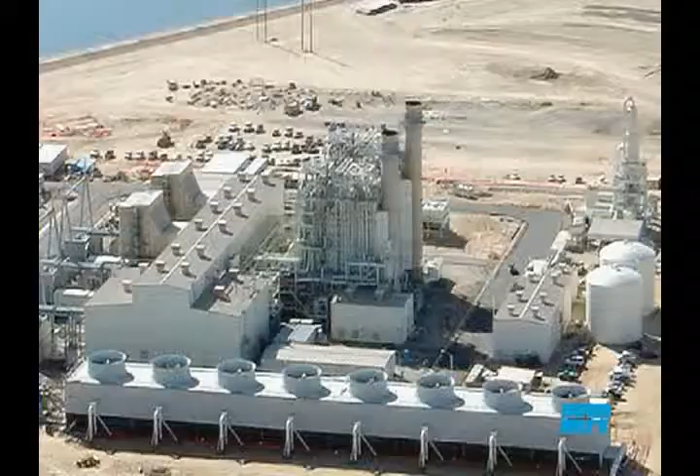Burns & Roe has designed a wide range of fossil fuel plants fueled by everything from oil to gas to coal. In fact, we were there for the first conversion of an oil-fired power plant to coal.

There was a period in the early 80s when the price of oil had skyrocketed. We were still at that time burning oil for a significant amount of the country's power. So people were looking seriously at converting boilers that had been designed to burn oil into burning coal.

One project in Korea actually did go forward. They did what we named a major conversion, which was a real rebuilding of the boiler, basically. And they got to 100% capacity. Took an oil design boiler with a concept that we developed here, converted it to coal.

As the environmental awareness era dawned, power plants increasingly featured new technologies for cleaner and more efficient plants. This removed pollutants and met the most stringent environmental requirements.

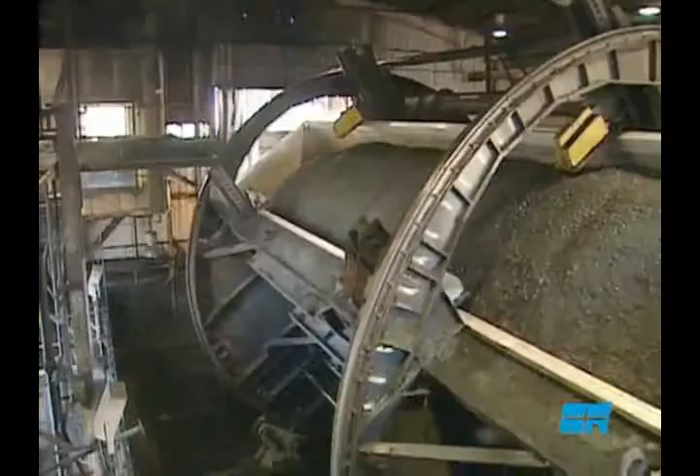The coal plants that we're looking at today are supercritical coal, size-wise about 700 to 800 megawatts, very large. And they are the cleanest plants you can find. We're proud to have just been contracted recently on the cleanest coal project being built in the U.S.

Building upon the new era of rural electric co-ops, Burns & Roe took on public power utilities, aggregating and forming their own generating and transmission co-op. This built Burns & Roe an enviable record as one of the largest power plant designers.

The REA plants tended to be real utility-grade, high-quality plants, and they became sort of our standard. We also assisted in developing the first privately owned, non-recourse financed coal-fired power plant in Southeast Asia.

We have been involved in the overseas markets for a long period of time. We've been involved in Hong Kong. We were one of the first engineers to move into Korea. We did all the early supercritical power plants in Korea.

We have been involved in Thailand from the early birth in the power field. We were the first. We did the first feasibility study for a nuclear power station in Thailand.

We have been involved in Australia for many years as a result of a joint venture established some years ago. We have had offices in Singapore for at least the last 5 years, and we're recently opening an office in Bangkok from which we're going to be addressing the Southeast Asian market.

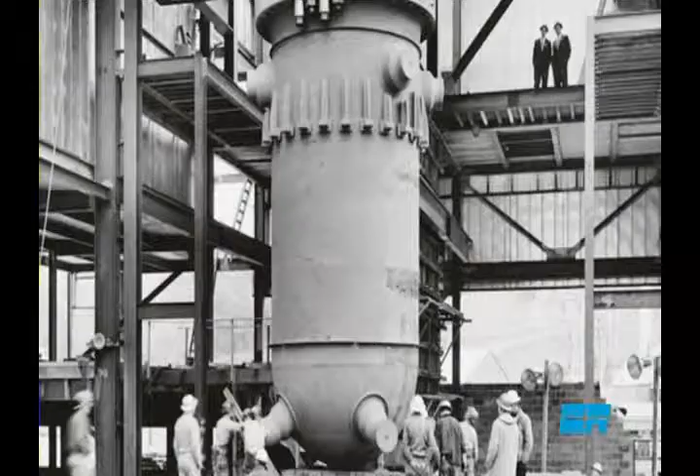Burns & Roe's roots in nuclear power were set down in the 1950s with our involvement in nuclear submarine propulsion. Soon, we were engaged in the work on the first U.S. nuclear plant in Shippingport, Pennsylvania.

As the development of nuclear technology continued, Burns & Roe was selected by the Atomic Energy Commission to build the new production reactor at the Hanford Atomic Energy Reservation, an advanced challenge for the dual purpose reactor.

Burns & Roe was also selected by Jersey Central Power and Light to be the engineer and construction manager for the first privately financed commercial nuclear power plant in the United States, the Oyster Creek Nuclear Power Plant.

So it was really a project that was very cutting edge and also required an awful lot of interaction with an awful lot of people, which is one of the things that Burns & Roe does very well.

When I started with the company in 1974, the company was really bustling with an awful lot of power projects, both for coal-fired plants as well as nuclear. And those projects were really the benefits and fruits of strategies that the company had set forth in the 50s and 60s and even earlier to concentrate on these specific markets.

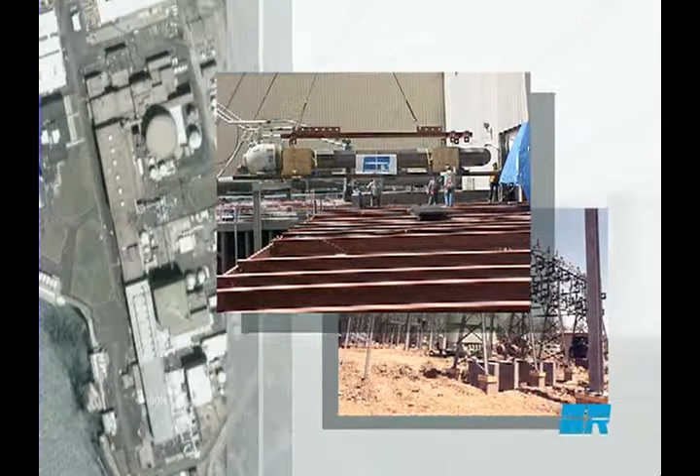As the decade progressed, Burns & Roe moved to the forefront of the nuclear power plant market, designing and/or constructing some 8,000 megawatts of nuclear power plants around the world.

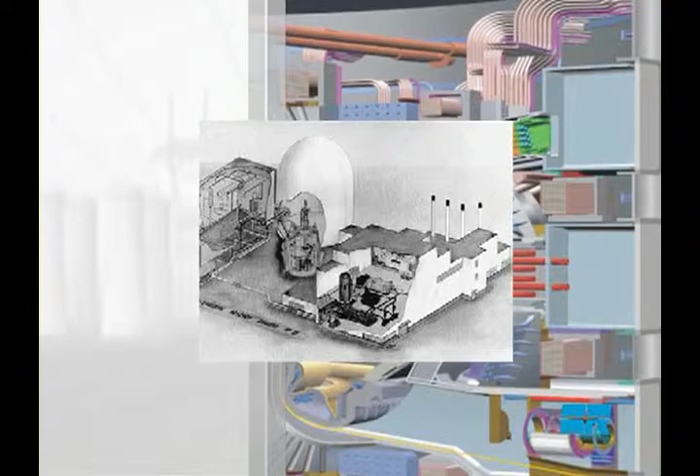We've designed first-of-kind technologies such as a liquid metal-cooled fast breeder reactor at Clinch River. Clinch River was what's called a breeder reactor, which actually allows it to produce more uranium fuel than it consumes.

The project was very important to us because it was another representation of how Burns & Roe had developed this first-of-a-kind capability to really take brand new technologies and apply them to the commercial marketplace.

And now, as the nuclear renaissance unfolds and new plants are being developed, we are again at the forefront of the nuclear power rebirth, a position secured by our legacy.

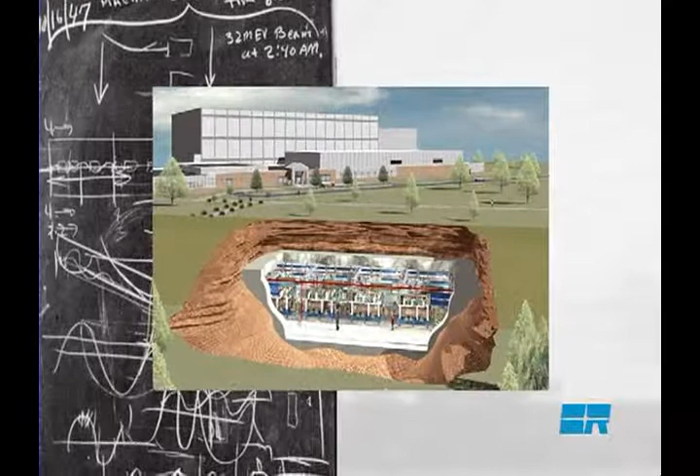In the advanced power sector, Burns & Roe continued to build its legacy of technology and innovation, working with the Department of Energy on programs such as MHTGR, and APT, an advanced linear proton accelerator for the production of tritium. What we did was develop a design for a linear proton accelerator, which was a mile long.

It accelerated protons to 9/10 the speed of light and operated, in the final third of that accelerator's length, at just a couple degrees above absolute zero temperatures. The tradition of advancing technology applications remains a core part of our culture and focus.

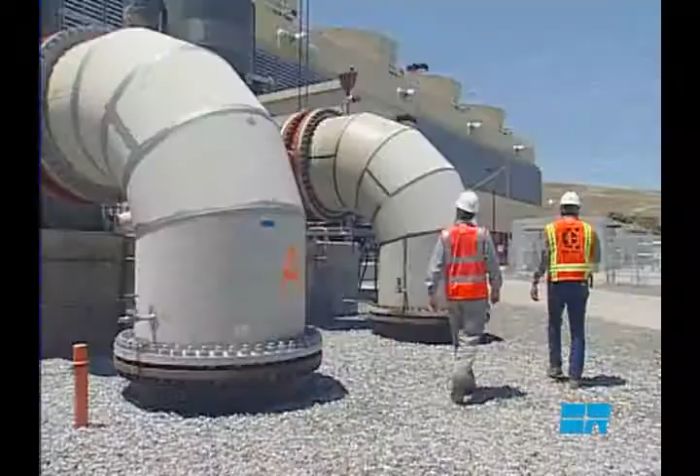Through the 1990s, markets changed with initiatives for deregulation of the power market. Burns & Roe responded and became one of the largest designers of gas-fired combined cycle plants in the United States, the favored technology of the independent power producers.

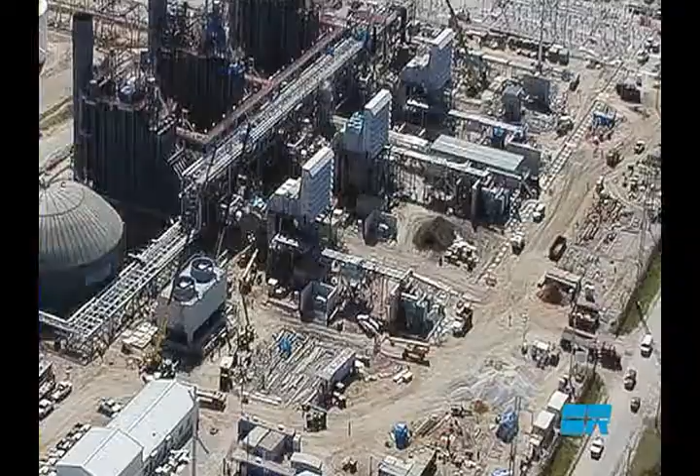With the early legislative moves of the mid-1980s to bring competition to power markets, small cogeneration and other qualifying facilities launched the independent power movement. Burns & Roe used its power design skills, contracting responsiveness, and flexibility to establish a strong base in this new age of engineering, procurement, and construction management projects.

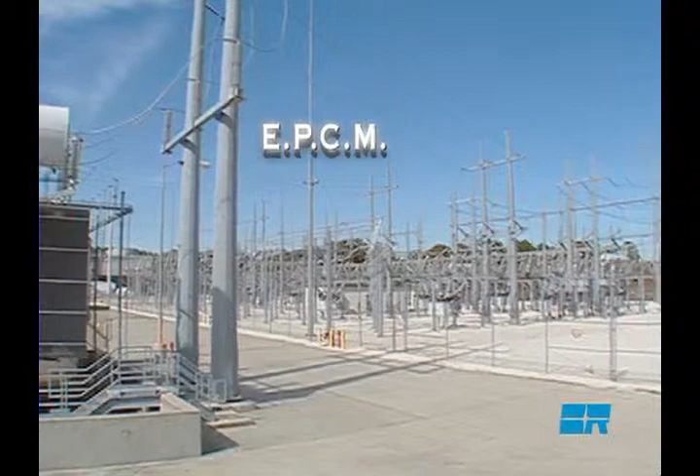Another example of a set of projects that really shows how we work closely with our clients and our ability to bring technology and innovation to them is represented by the Calpine and Siemens projects we've done over the years, particularly the cogeneration project. This project was owned and is owned by a combination of an independent power producer, Calpine, and a large international trading company from Japan, Mitsui.

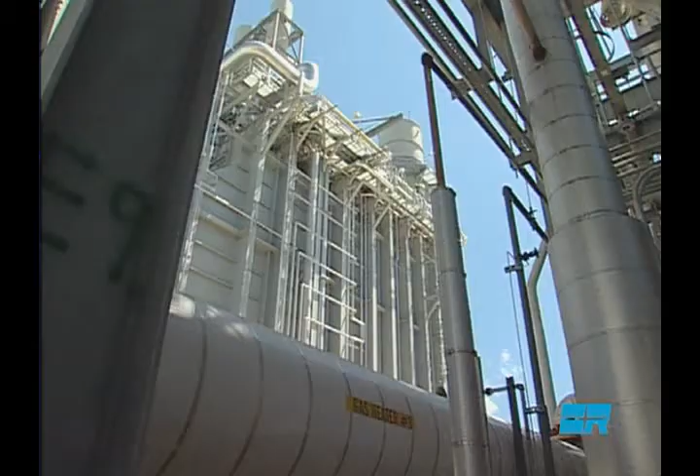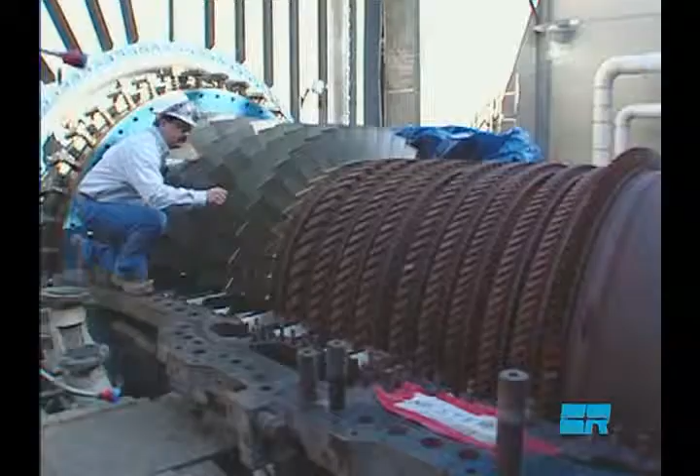We had been doing the engineering on the project, and they asked us if we could expand our scope into doing procurement, services, construction management, and startup. What was different about it was that this project is being independently financed. This was a more economic way of doing it, cheaper. We're using local contractors and using our expertise.

Calpine said along the way that for their most complex plants, the ones that were most technically challenging, they would come to Burns & Roe because of the confidence they had and the excellent working relationship in our ability to design these plants under difficult technical requirements. It's a real mark of the technical innovation and capability, as well as the responsiveness, that we bring when working closely with the customer.

Waste-to-energy and biomass plants also took advantage of the open access provided by this new competitive power legislation, attempting to deal with another serious environmental issue: what to do with the world's growing waste. Burns & Roe again applied its technical know-how and designed a major share of the mass burn facilities built on the east coast of the United States.

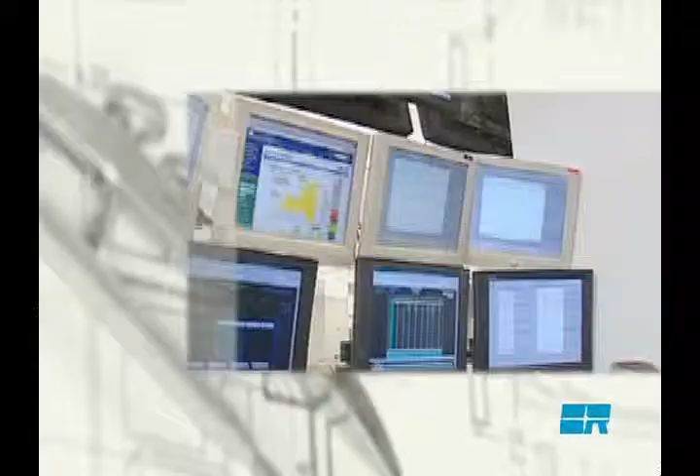The continuing expansion of deregulation led to the dominance of independent power and gas-fired combined cycle plants, while Burns & Roe's excellence in design and innovation led it to be the leader in cogeneration, as ranked by Engineering News-Record.

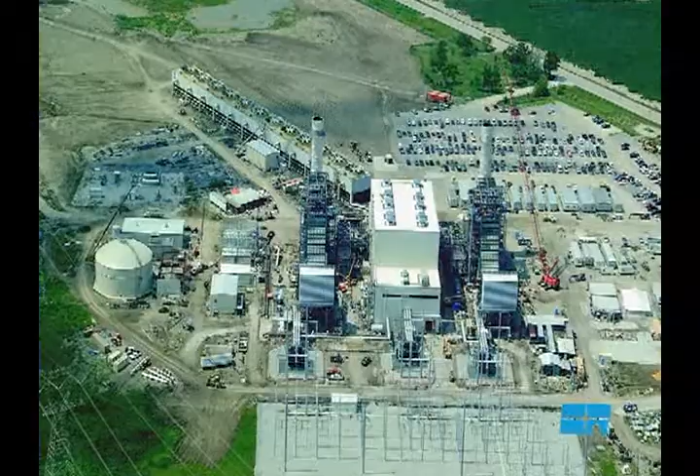Turning its outstanding ability to apply technology, the company undertook a reinvention of how work was performed and how projects were executed. Burns & Roe was one of the early adopters of three-dimensional computer-aided design and engineering.

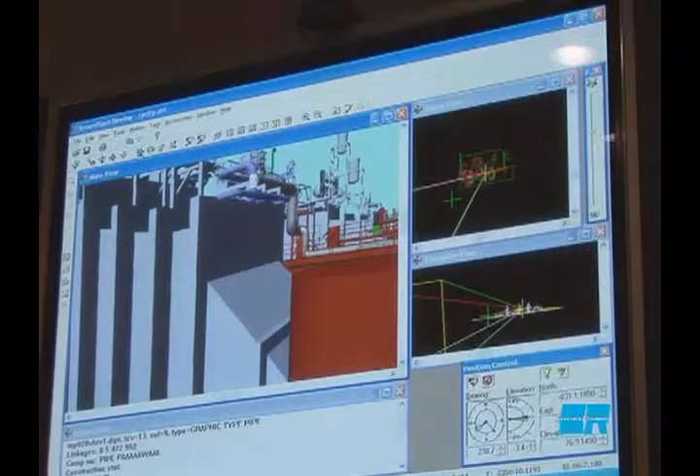Traditionally, what we would do is have each individual engineering and design discipline—electrical, mechanical, civil, structural—do the work on their own set of drawings, then share those drawings with the other groups, and also do some composites to see the combined effects. That was a very time-consuming and long process, and also subject to a good deal of error.

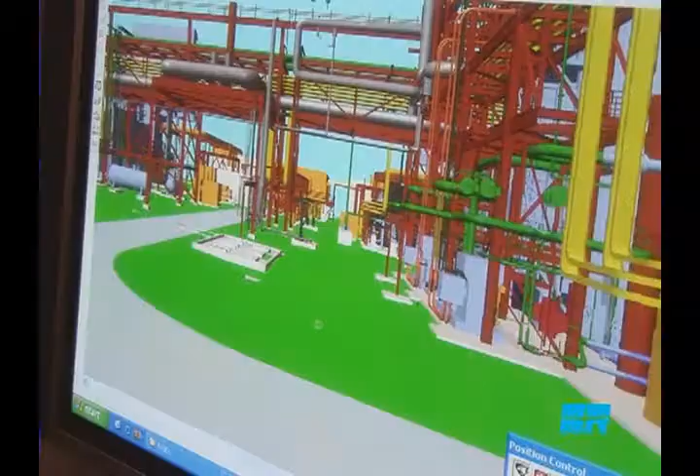Computer-aided design and 3D modeling completed the transition from integrated 2D orthographic drawings to today's use of real-time 3D electronic modeling, with advanced features such as automated interference checking.

The computer would actually run a program that we used to run overnight, or still do run overnight, to look at everything and say, okay, this pipe runs into this piece of steel, so you need to move one or the other. It was, again, a very powerful way to make those changes.

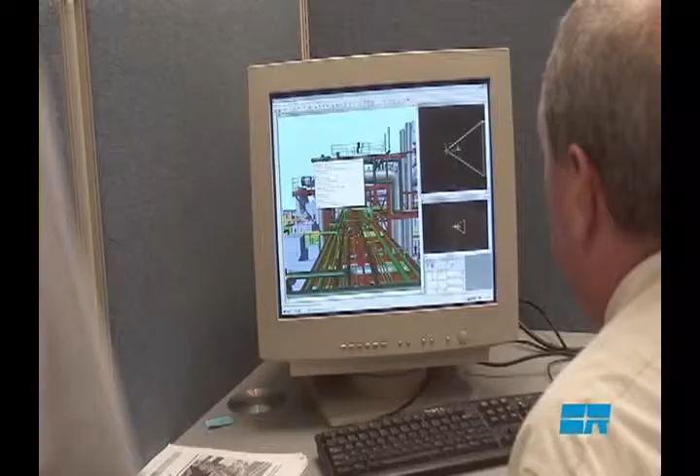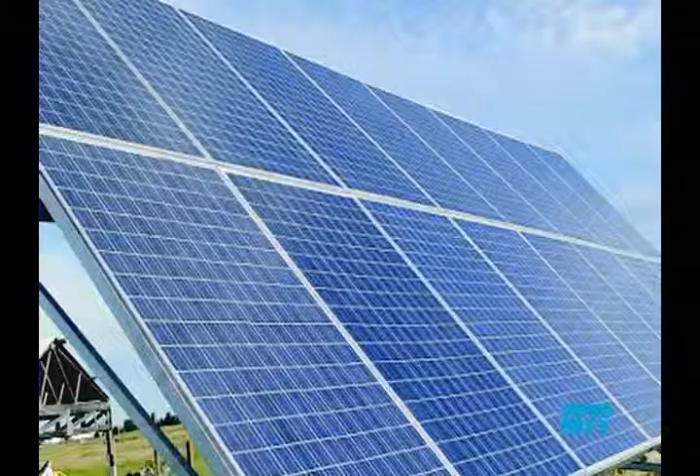Advancing the state-of-the-art in engineering and construction projects continues to be a top priority focus as we look to the future of renewables, gasification, and other generating technologies.

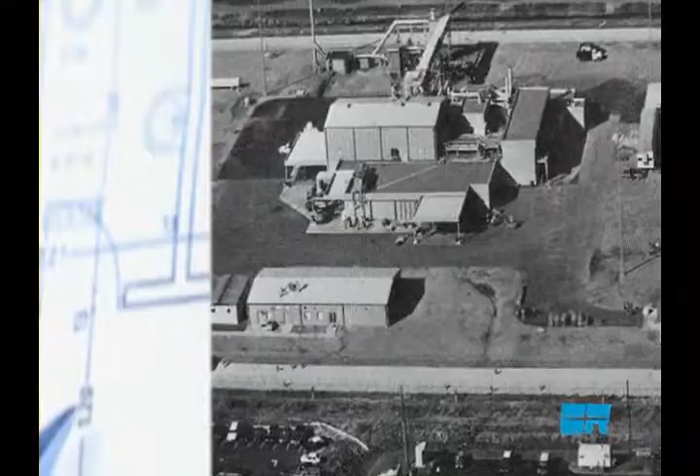Our tradition, our skill, and our commitment to building long-term relationships with our clients stems from our roots and history over many years as one of our founders' greatest legacies. Our legacy is the key to both your future and ours.

Our approach to the business is to get involved with our clients, respond to their needs, develop solutions specifically related to our clients, and add value.

In the end, it's the technical and creative knowledge and dedication of our employees, the engineers and other staff in this organization, that define who we are and what we are.

Truly, it is the outstanding people that you would be working with as a client of Burns & Roe that will make the difference in producing a final project that meets all of your needs.